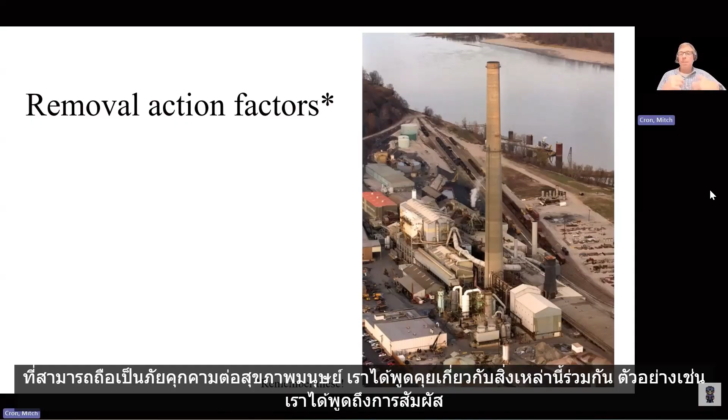And we also underscored that the regulation that implements the Superfund statute is called the National Contingency Plan. Within the National Contingency Plan, EPA identifies certain situations and conditions that can constitute a threat to human health. We talked about these together. For example, we discussed exposure of people and food chains directly to hazardous substances in soil, in surface water, in groundwater, etc. We talked about the contamination of drinking water supplies.

We talked about the possible threat of a release from drums and tanks that may have a loss of competency, maybe near failure. That is a particular threat of a release of hazardous substances into the environment. We talked about high levels of soil contamination near the surface that could migrate, for example, as sheet flow during heavy rainfall. We talked about weather conditions in the near future that could cause contamination to migrate, and mostly that's referring to severe weather events.

Hurricanes can cause very heavy rainfall, very heavy wind, and can serve to cause contamination to migrate away from a site. We also talked about the threat of fire and explosion. And we've seen this threat. You've seen this threat at Win Process. I've seen this threat at Safety Light, that radioactive factory in Pennsylvania.

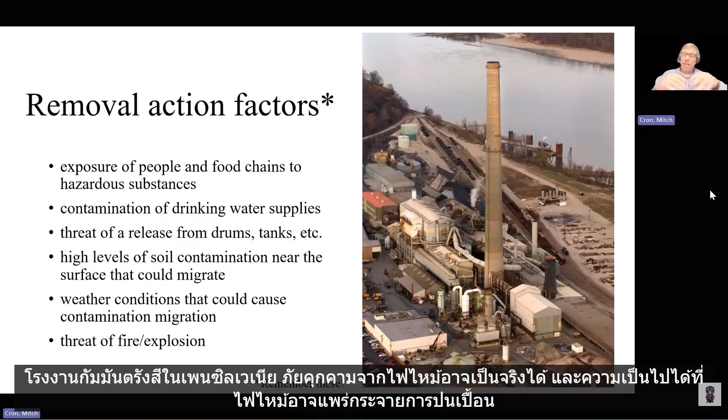The threat of a fire can be real, and the possibility that a fire could spread contamination away from a contaminated site can constitute a threat to be addressed by removal action. And finally, we recall that within the regulation, there's always a catch-all. There may be some other situation or factor that the EPA didn't think of when it was preparing this regulation, so there's kind of a catch-all at the end, other conditions.

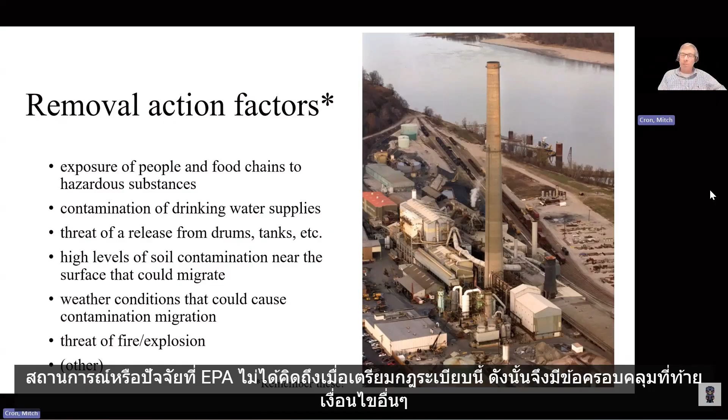EPA regulation talks about how to react to a threat, and it's not extremely detailed. You don't see a whole lot of language in the statute. The statute, of course, is passed by the legislative branch, and you don't see a lot of information in the regulation either. The regulation is promulgated by the executive branch of government. But EPA does say some things about how to react to a threat when it happens.

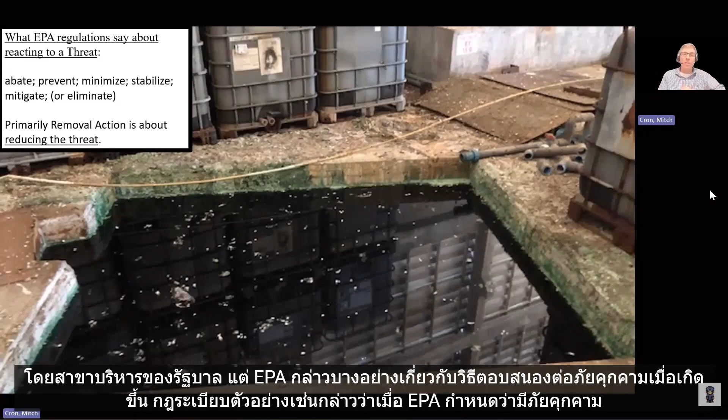The regulation, for example, says when EPA determines a threat is present, whether it's exposure of people and food chains to hazardous substances, exposure of drinking water supplies, the threat of a fire or explosion, the threat of pending weather events that could cause contamination to migrate, the threat of containers rupturing or tanks rupturing.

The regulation basically says that EPA is authorized to take action to abate, prevent, minimize, stabilize, mitigate the situation. It talks about eliminating the threat as well, but mostly the words of the regulation talk about attempts to reduce the threat. Sometimes not entirely eliminate the threat, but how to reduce the threat in a reasonable, common sense way.

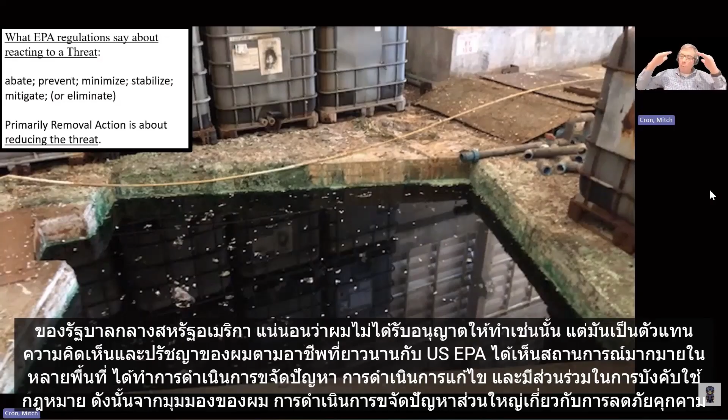And I say at the bottom of this particular text box, from my perspective, and I warned you at the beginning of all these pre-recorded sessions, these slides do not represent the official position of the United States federal government. Of course, I'm not authorized to do that, but they do represent my opinions and my philosophies based upon a long career with US EPA, having seen many situations at many sites, having performed removal actions, remedial actions, and been involved in enforcement. So from my perspective, removal action is mostly about reducing threat. It's seeking to manage risk as opposed to eliminating risk.

It's a photograph, incidentally. I know I didn't do this throughout the past 5 days, but I'll mention this one. This is a photograph of some form of liquid waste, which was present in a pit at the Win Process site when I was honored to visit that site with the PCD, the Department of Industrial Works, and of course the Thai Ministry of the Environment, and many other regulatory officials during a tour of that site in 2023.

But it struck me. I mean, it was an exposed pit of some form of liquid industrial waste. So it's an example of waste storage at Win Process, a source of contamination, which existed, of course, before the fire at that site in 2024.

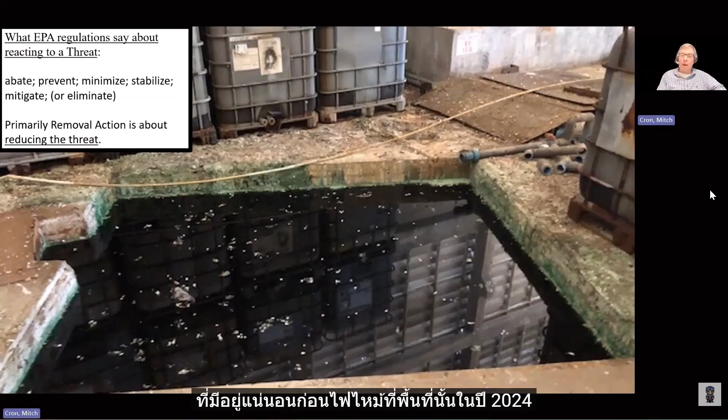Another site of Win Process, undated, unfortunately, pre-fire. And I think what this site demonstrates to me, and I hope you had an opportunity to explore this further during the Win Process site inspection, is that the threat is certainly on site. There's certainly sources in the burned buildings, in the unburned buildings, outside the buildings. The lagoons, of course, represent a concern.

But it was evident from photos like this and from my own experiences and observations, and I'm sure you and your team have had similar experiences and observations, that contamination has migrated downstream and down gradient from Win Process. There could be exposure concerns, and I hope we get a chance to kind of underline what those were towards the end of this presentation.

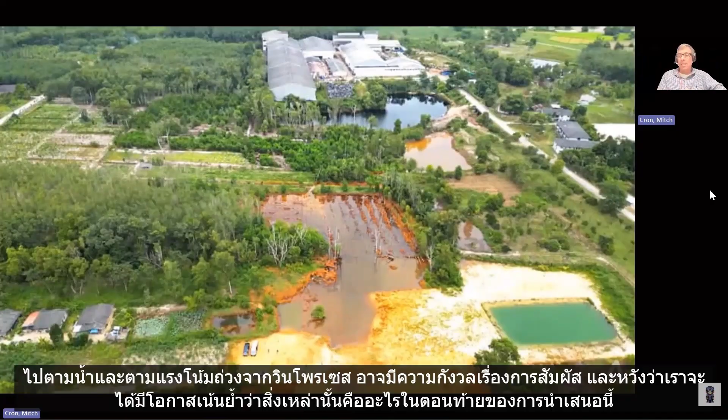So, although the regulation gives us some general terms about reducing, mitigating, abating threats posed by hazardous waste sites, the statute gives us a couple of examples in terms of what the legislative branch of government was thinking in terms of what a removal action would look like. And some of the language is very general. Any actions the president needs to do to prevent, to minimize, to mitigate damage to public health. So the definition of removal action doesn't talk about permanent, comprehensive site remedies. Sometimes those can be unrealistic.

Sometimes, in my opinion, what needs to be focused on now is stability, security, and reduction in exposure, more removal actions as opposed to comprehensive, long-term, high-dollar, permanent remedies like remedial actions.

So the statute does say that removal actions are whatever the president needs to do to prevent, minimize, and mitigate damage to public health, to human beings posed by hazardous waste sites, posed by sources, posed by impacted media, etc. Give some examples. It talks about the definition of removal action, talks about the installation of security fencing, limiting the access to a site. That's a security enhancement.

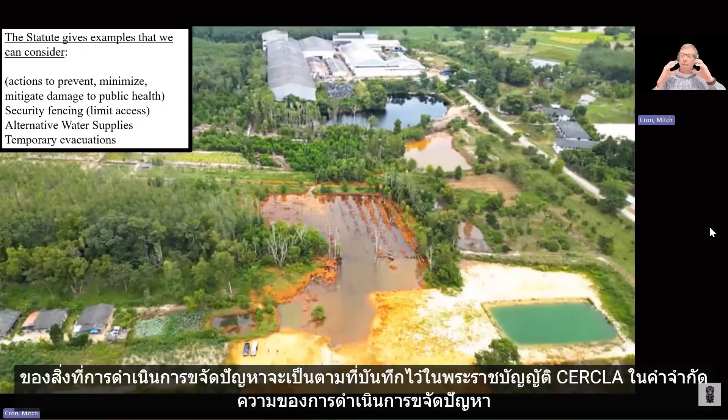And I think that's what temporary evacuations was talking about in that definition of removal action within the CERCLA statute. So, security fencing, alternative water supplies, temporary evacuations, those are examples of what removal actions would be as documented in the CERCLA statute in the definition of removal action.

And so what I want to do now is going to be exercise number 10, the final group exercise for our time together. And as you can see, there's 5 different pieces to this, and I'm so grateful for everyone's level of effort to work on these issues together, to exchange ideas together.

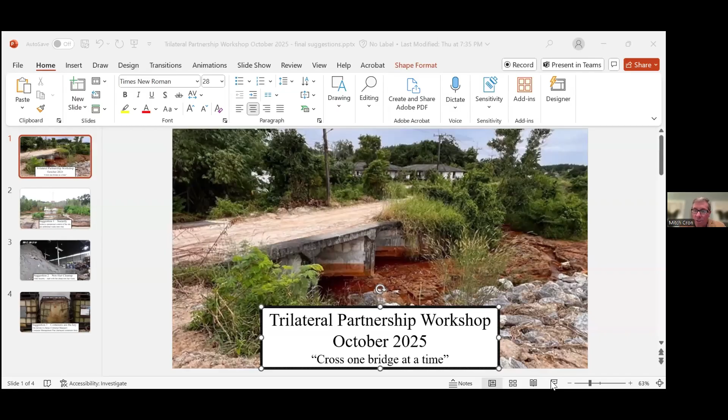Thanks for providing the videos and the photographs, I really appreciated it. I want to share my screen real quick. I've got just a couple of short slides to share my perspective. Dr. Hung was able to send me a number of photographs and videos and overall perspective during the week.

As I think you probably know, the theme of the presentations that US EPA put together were increasing stability, increasing security, and decreasing exposure. So I thought about reasonable, common sense, hopefully low cost, hopefully relatively quick activities that made sense. I recognize that the investigative teams on the ground have the best perspective and the best insights.

But these were some insights I had based upon materials shared by the workshop leaders with me, and I really appreciated that. So, Trilateral Partnership Workshop, October 2025. It's kind of an Americanism, an American saying, but maybe it's international. The theme I wanted to focus on was: cross one bridge at a time.

The solution to this whole process is going to take years, decades, and probably a number of careers in the making. It's going to be a long time before you get to completion on that site. But my thought was that if possible, cross one bridge at a time—do what you can reasonably do in the short term to increase stability, increase security, and decrease exposures.

Dr. Hung, I couldn't help it—the photograph of the bridge you sent me and the staining on the bridge just jumps out at you, so I wanted to share that in my presentation. So I have 3 suggestions for your consideration.

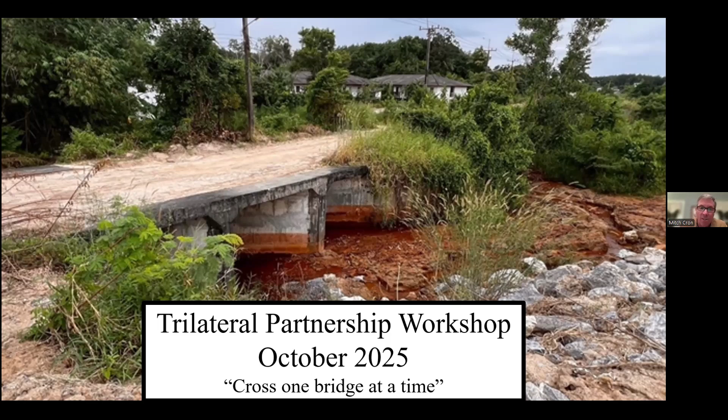The first suggestion is, obviously, security. Security is very important to me at a contaminated site. The idea I had was to seek to achieve operational control of the site as soon as possible.

In my own experience, sometimes when you have an abandoned, unstable, contaminated site that's been abandoned by its operator, those kinds of facilities can be real magnets for folks that want to bring additional hazardous waste onto the site for illegal dumping. Sometimes it's occurred in the USA that when a site is abandoned and known to be contaminated, other parties seem to think you can't make things worse by bringing more waste there. So these hazardous waste sites can act as a magnet for more hazardous waste from almost illegal operators. So one of the most important things to consider is really seeking to gain operational control and security at the site, to ensure no additional waste comes onto the site.

I recognize that if complete security isn't really a possibility, if that's unachievable, then at least make sure you've got good control of the roads coming onto the site. Gates, bollards, fences, warning signs, even visits to the site by security and police personnel—maybe not every day, but as part of their routine. If you could work with local officials to get them in the habit of checking security at the site, that might be very helpful, just to prevent the site from acting as a dumping ground for additional hazardous waste from other somewhat illegal, somewhat unethical waste transporters.

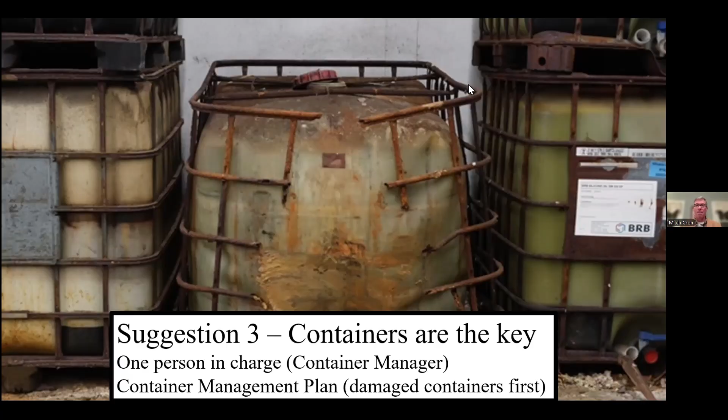A little bit more of the question for you. I've seen it throughout the workshop that in the case of leaking and broken containers like this, we should make a plan to replace the container first.

Do you agree on that, Mitch? Could you repeat that question, Dr. Chewi? My point is that the container that seems to be leaking and broken should be replaced first, so that it can stop the immediate leaking. But before doing anything else, just replace the container.

Yeah, something like that. I could not agree with you more. I completely agree with you. It's kind of like a site stability concern. If you know you have an ongoing release or an imminent release from containers that are clearly in bad shape, if I was the container manager and I had my inventory complete and knew how many containers were out there, the condition of the containers and contents, what I would do is start out - you got to use each baht or each dollar smartly. And I would start with the damaged containers first.

If you can dispose of that off-site safely, that's probably best. If you don't have that capability today, I would say transfer that material to a new container or a used container in better shape, but definitely start with the damaged containers. Once those are sort of stabilized, then you move on to the undamaged containers.

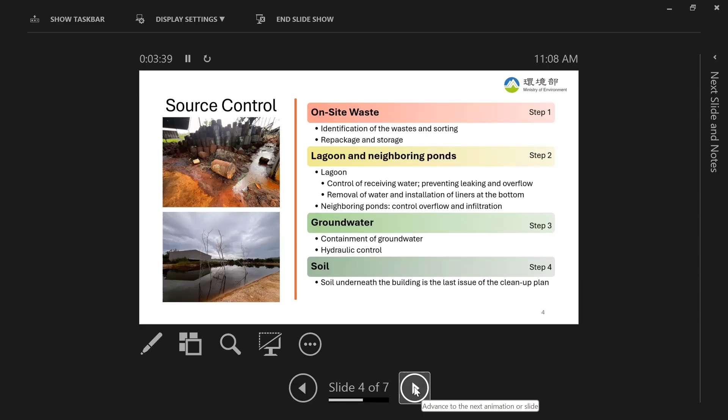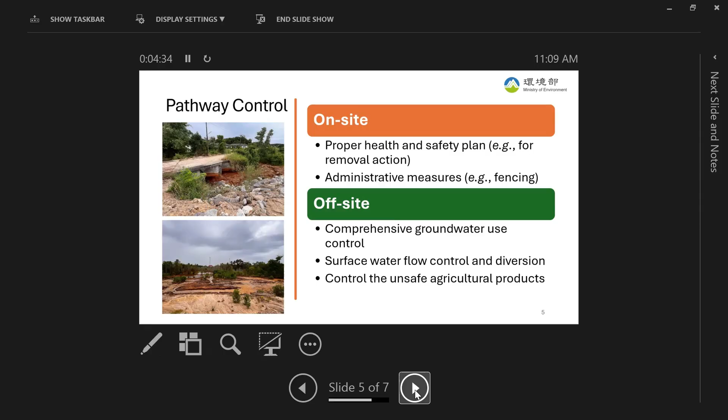Also for the offsite, we know that without proper resources to do the remediation, maybe we can think about some groundwater use control or communication, and also some surface water flow control, which is actually causing the migration and expansion of the contamination.

Finally, we went through some sampling demonstration, and I think in the future, for the monitoring plan, maybe we should think about the objective of the monitoring, which can help get more appropriate monitoring data in the future.

Also, the methods available to us, including the soil and groundwater sampling methods, should maybe be linked into the sampling plan, including cross-contamination information when you're doing sampling. So that's our observation, and this basically concludes our afterthoughts for the site. If there is any supplementary information, anything I'm missing, you can put it in. Next, please.

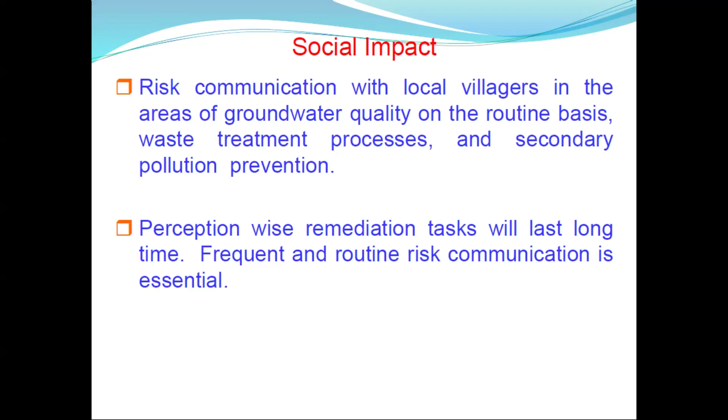Because I supervise a lot of contaminated sites in Taiwan, I have met with lots of local people and with people from government on both sides. Therefore, I would like to share my experience particularly on this part, the social impact. Never underestimate the potential social impact. Always put local people's benefit at the top of the list. Okay. Next, please.

I think Dr. Huang just mentioned a little bit about the technical part. I'd like to summarize certain points from the very beginning to the end of this site for your reference. So if you have any questions regarding what we should do in the next 36 months or maybe in the next 5 years, I would like to discuss with you in more detail after my quick presentation. So let me finish that and also interpret some of the details, and maybe we can discuss that after my presentation.

First thing is always keep that in mind: groundwater resources. I noticed it's not a very overpopulated area. People are scattered in the nearby area. However, they pump groundwater for irrigation. They may pump groundwater for drinking purposes or not. Or, in order to save money, they will pump groundwater to wash their car, to clean vegetables, to do the laundry, all those activities.

So protecting groundwater resources will be the first priority. Okay, that's the first issue I'd like to mention. It doesn't matter if the air quality is bad or something else is bad, or there is a storage tank leaking on site, always consider groundwater resources.

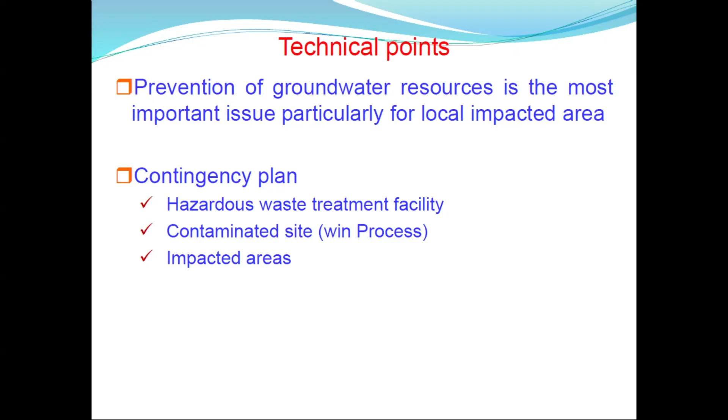Okay, next please. Regarding the remediation plan, based upon our past experience, first things first. We always try to keep that in mind. Removal of hazardous waste and solid waste will be the first priority. Otherwise, you cannot achieve soil and groundwater remediation work. And I know it's a very difficult job, therefore I'll go through the details.

First of all, we see lots of 55-gallon tanks. We also see big plastic tanks. Some of them are cracking. Some of them are broken. Some of them are completely, well, I think in good shape. No matter what, there is hard work we should propose. Maybe we don't have a budget, or maybe we will have a budget in the next 3 years. Always keep that in mind.

Characterization of the hazardous waste, tank by tank. Because it's unlike the water bottle I'm holding; I definitely know this is water. It might have different layers, which means different kinds of solvents mixed together, or maybe plus a lubricant. That makes things very complicated. So I know this task will take some time.

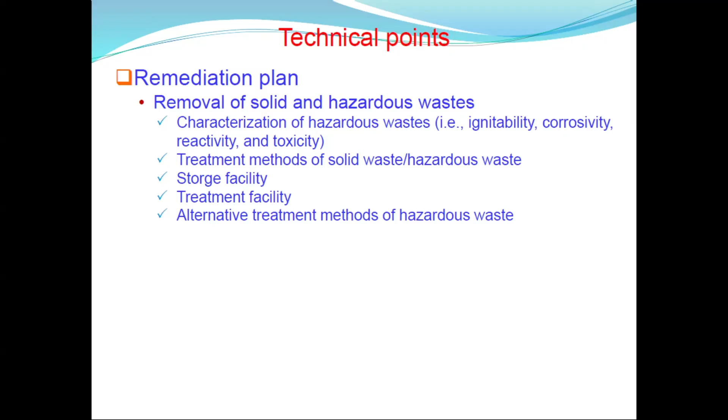And finally, of course, the treatment facility. Right now we have a contract company doing that, and we don't worry about that. In the role of the PCD, you might be able to supervise their performance routinely. Okay, that's what I would like to recommend. And finally, as I mentioned earlier, the alternative treatment method of hazardous waste. If this company doesn't work out, we should have an alternative method. Next slide.

Okay, and now we go to the major issue. After we classify and characterize hazardous waste and solid waste, and we find several methods to treat them or temporarily store them, then we can move on to soil and groundwater remediation work. And the first thing, rule of thumb, is to establish the potential boundary of the impact area. And keep that in mind. People might think you are over-exaggerating, but always try to be more conservative. Put a bigger area instead of a smaller area.

Because if you put a bigger picture, at least people know, oh, right now I'm living inside the boundary, I'm aware of that. But if you put a small boundary, people outside the boundary, eventually their groundwater gets contaminated, they might blame you. They say, hey, you didn't tell me the truth. So, as I suggest, put a bigger boundary. And also, when you set up how many days you will need to achieve the remediation, sometimes it will become easier. Okay.

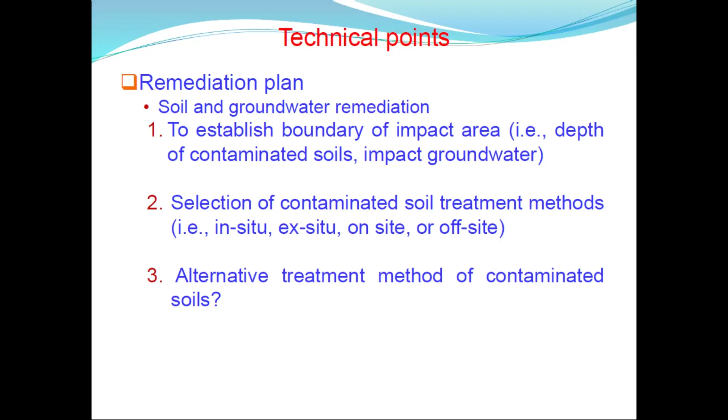And finally, I think Dr. Huang just mentioned that, but I would like to emphasize the importance of a monitoring plan. In contrast to the remediation plan, I think a monitoring plan will not be very costly; the budget should be less. Why? Because monitoring is just doing something routinely. So you should have a hazardous waste monitoring program on site. Make sure to watch, to oversee those inorganic and organic wastes on site, no matter if they're in a plastic container or in a 55-gallon tank.

Make sure they are safely settled down on site. Okay, that's the first monitoring program. The second one, you definitely need a groundwater monitoring program. As I mentioned in the first slide, groundwater is very important because people are going to drink that.

So in your groundwater monitoring program, you should include all the major parameters, which means all the heavy metal analysis, like arsenic, mercury, cadmium, copper, lead, zinc, chromium. Because these days, all the laboratories are equipped with ICP. With a one-shot deal, they will be able to analyze all the elements you are interested in. It will not be time-consuming or very costly. So keep that in mind.

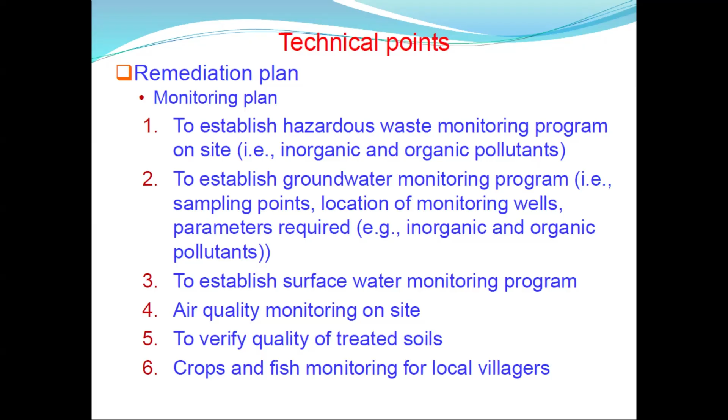And finally, if you have enough budget, you can do that. If you don't, just keep it in mind. Because people in the nearby area are farmers. So crops and fish, they may eat them or sell them to the market. So for food safety, you can propose crop and fish monitoring to make sure they don't contain heavy metal. Okay? Next slide, please. The final one.

And finally, I do like to mention, we need to build up our Berlin Wall, as I mentioned, in the lagoon area. As I discussed with some of your colleagues, in the groundwater downgradient area, you can either use a sheet pile, which of course I know is very costly, or maybe use concrete plus FRP coating because it's corrosive. It may be very basic, pH 14, or acidic, pH less than 1. I think at least the FRP will prevent further south migration. Okay?

And all of these issues, I think I'm a very practical person. I try to give our friends in Thailand very practical suggestions, not those in the clouds which you cannot achieve or are over budget. So that's all my conclusion regarding the Win Process site. And I'll be happy to take any questions and discussion. Thank you for your patience and listening.

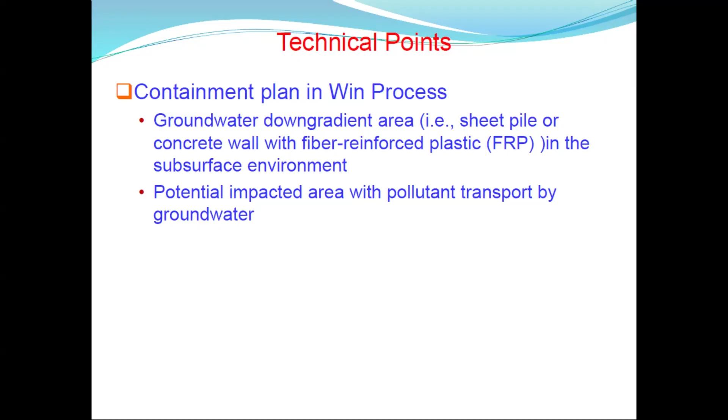Thank you. I may want to ask a quick question for you. There's a lot of discussion on building a Berlin Wall, not above ground level, but underground, and also a little bit for runoff control. There has also been discussion that for groundwater control, if we use the sheet pile system and do a bad calculation or no calculation at all, maybe it's not working, right?

Instead of that, many people suggest we should do PRB, which in Thailand we don't have any experience with. A lot of people say they know, but we don't actually have experience. So how do you feel about PRB versus sheet pile? And if so, then maybe a future cooperation. Can you help us calculate and set up a good PRB system?

Yeah, we use a PRB in Taiwan. Before giving a more detailed explanation, I'll try to explain the PRB, the permeable reactive barrier. I think it can be used in two ways. One is to prevent the contaminated chlorinated solvent, such as I think we have at this site. And for heavy metals, because you precipitate the heavy metal. But again, that will create a secondary problem because there will be precipitation in the subsurface environment. You may need to dig it out and treat it as hazardous waste or solid waste.